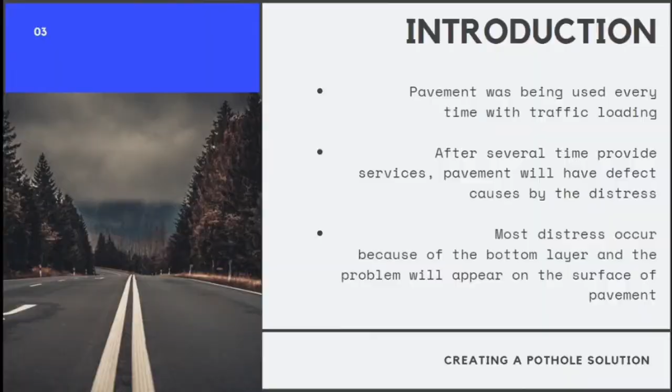The real location that we chose is at Selangor Darul Ehsan road pavement distress, located at Jalan Putra Perdana 9A, Puchong, Selangor. This 1 kilometer road, used every day by the surrounding population as a main road, will give a negative impact if the distress problem is not solved or overcome.

This road is used by all the population near the road. Of course, it will give a bad impact if the distress or defect is not solved or overcome, and maybe a lot of complaints were made, but the local authority needs time to make a repair or maintenance.

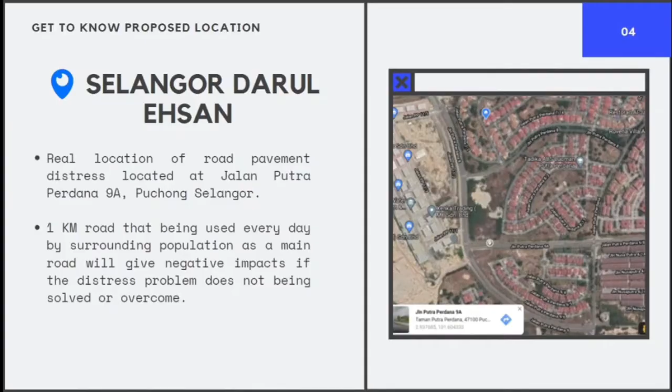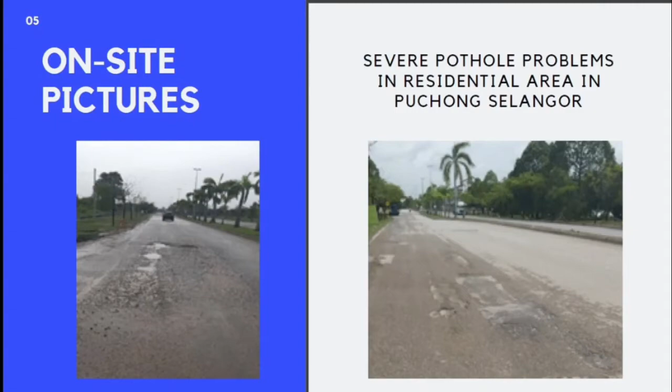So this is the on-site picture, and this defect occurs on the surface at the located area. We can see how bad it is, how the pothole and other distress are, and this will give a bad impact to the users and maybe a very negative effect for them.

For the literature review, the important content that I will present is pothole, road maintenance, and pavement mixture technology.

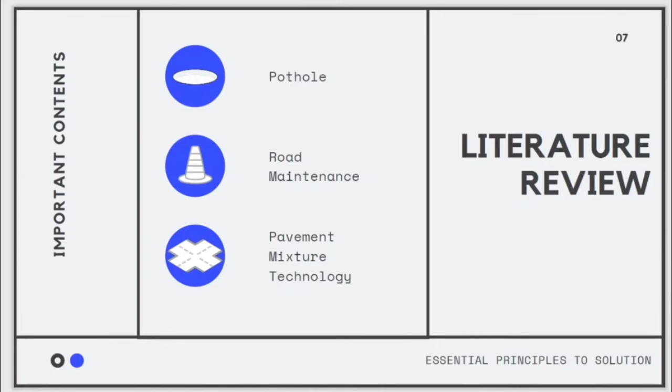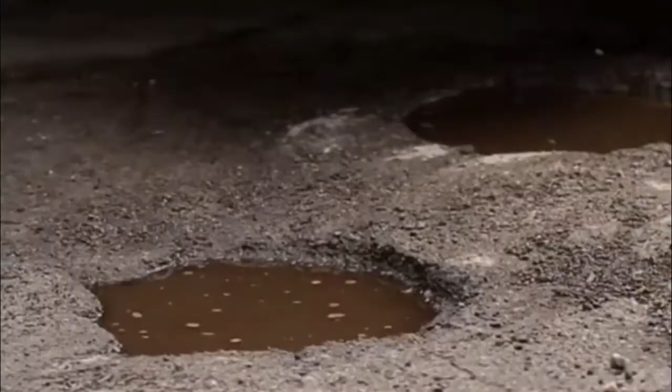So for the first one, about the pothole: physically it has sharp edges and vertical sides near the top of the hole. The pothole is likely to occur on roads with thin HMA surfaces around 25 to 50 millimeters, and occurs on roads with 100 millimeter or deeper HMA surfaces.

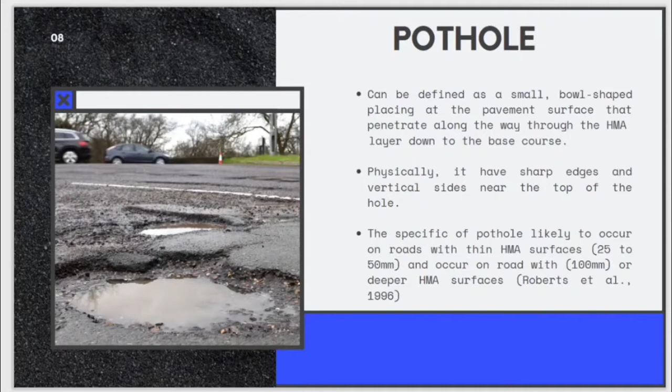It can be defined as a small bowl-shaped opening at the pavement surface.

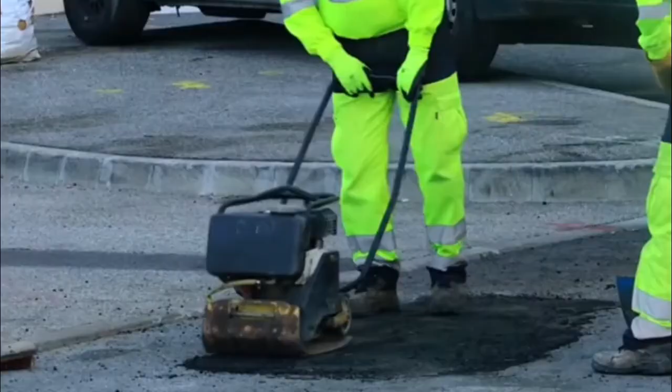For the next one, the literature review about road maintenance: a number of researchers have studied the performance of pavement networks and the likely causes of distresses. It was stated that the most likely causes for the worsening of road networks in Jordan are, for example, trucks with actual loads exceeding the recommended limit, poor sewage systems, and lack of quality control.

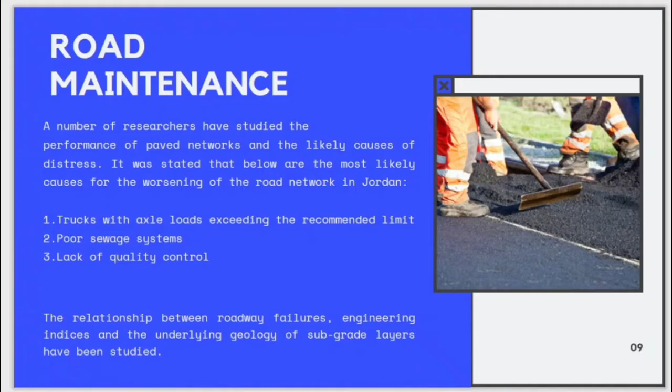And then for the third main content of literature review, the pavement mixture technology, which might be the main focus of our project writing.

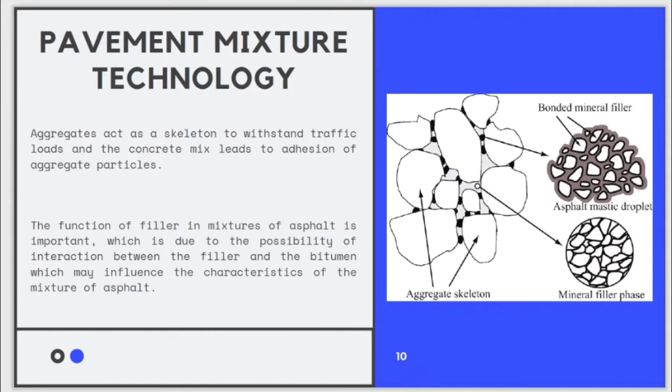The aggregate acts as a skeleton to withstand traffic loads, and the concrete mix results from the adhesion of aggregate particles. The function of filler in the asphalt mixture is very important, due to the possible interaction between the filler and the bitumen, which may influence the characteristics of the asphalt mixture.

Waste material may be considered mainly under the following categories: the first is industrial waste, such as cellulose waste, slag, bottom ash, and fly ash. The second is municipal or domestic waste, for example scrap rubber and glass waste. The third is mining waste, such as coal mine waste. And the last is construction and demolition waste, such as recycled concrete aggregate and brick waste.

To determine how to fix the problems and improve the durability of the road, we carried out PCI tests. The test was carried out by selecting 1 km of road from the section, and we divided it into 10 unit samples with 100 meter length each.

This was carried out by determining the distresses occurring at 5 out of the 10 samples, with an interval of 2 - the samples selected are 1, 3, 5, 7 and 9. The PCI value was calculated by determining the deduct value, total deduct value, and corrected deduct value. The type and severity of distresses are recorded in the survey form.

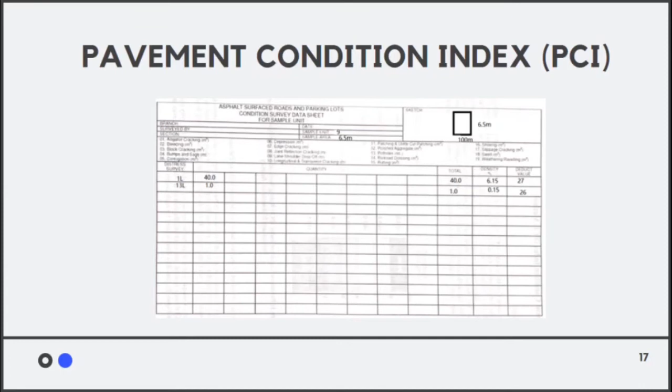As shown in the survey form, the density and deduct value were calculated and recorded also. We got an average of 55.4 PCI, which is considered fair condition and requires rehabilitation.

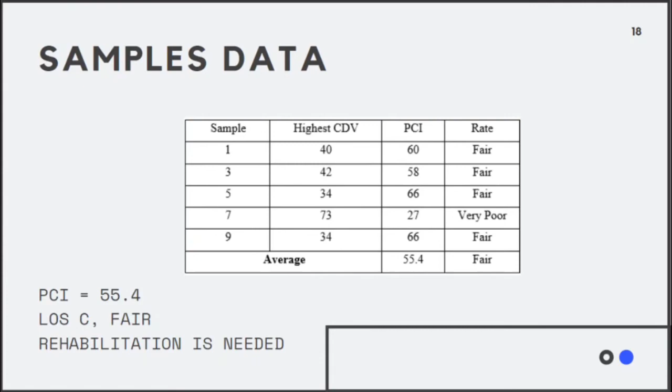Rehabilitation is used to repair the road without reconstructing it. It can be done by just resurfacing the road, and this is useful because flexible pavement always has a shorter lifespan, and most of them cannot last more than 10 years.

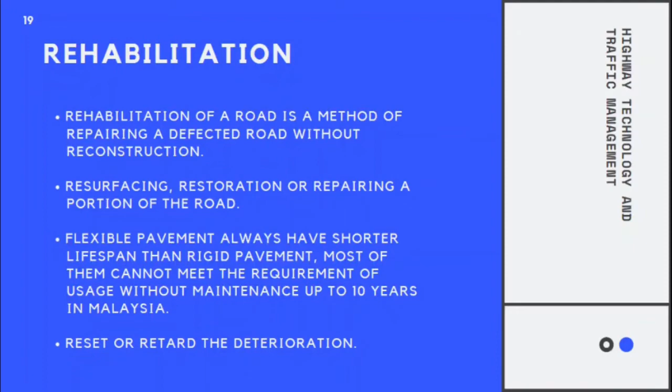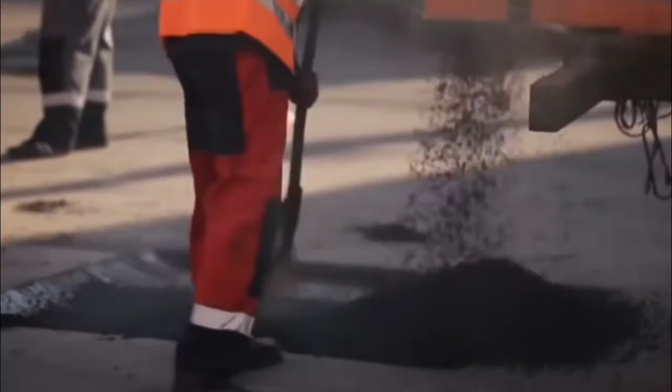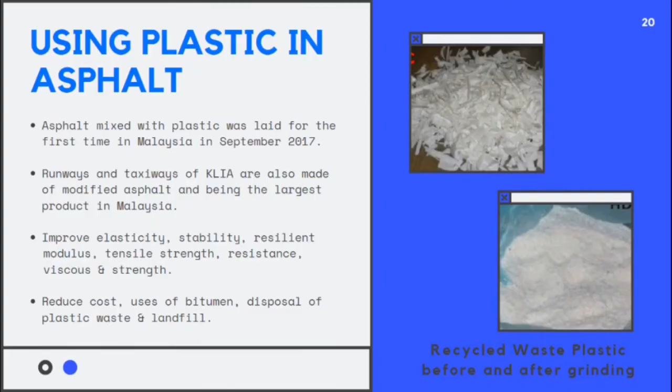In the meantime of rehabilitation, the innovation of mixing plastic into asphalt is introduced, and it has been tested in Malaysia since 2017 at KLIA. It improves elasticity, stability, and several other properties. It also reduces waste, usage of money, and pollution. The equipment used for rehabilitation is mainly a hot mix plant, shovels, bulldozer, and roller compactor.

First, remove the surface of the pavement which is in distress. Then break up the existing seal to remove the old and worn material. It also removes the road base if necessary. For the asphalt, you cut plastic into small pieces and heat the aggregate at 160 degrees Celsius to 170 degrees Celsius in the hot mix plant.

We then pour shredded plastic into the hot aggregate, so we can add the new materials on the surface and compact the surface. After compacting, we can seal the surface and let it cool for 10 days. After that, the road can be used and only maintenance will be needed.

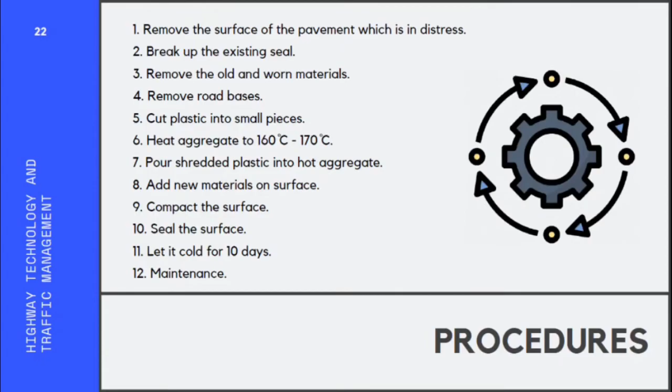Hi, I'm Izzah. So as a conclusion, in terms of practicality, it is realistic and workable since Malaysia has been ranked 8th among the top 10 highest offending plastic polluters globally. This innovation will focus on the usage of waste plastic in recycled form, as pavement asphalt can serve as a valuable outlet for such types of waste materials.

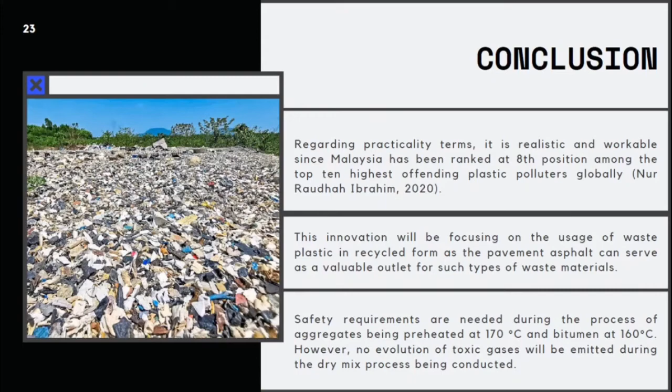Safety requirements are needed during the process of aggregates being preheated at 170 degrees Celsius and bitumen at 160 degrees Celsius. However, no toxic gases will be emitted during the dry mix process. Next, efficiency in field implementation is undeniable since it has already been implemented in the real world, so it is reasonable to be conducted widely in Malaysia.

Reduction in the requirement of bitumen by approximately 10%, avoiding anti-stripping agent use, and development of eco-friendly innovative technology are some features that lead to cost effectiveness. Apart from that, it is beneficial to the country and society by making roads more durable and water resistant to some extent. The utilization of waste plastic helps to consume substantial quantities of plastic waste in the environment, leading to more economical roads of better quality and safety for Malaysian road users.

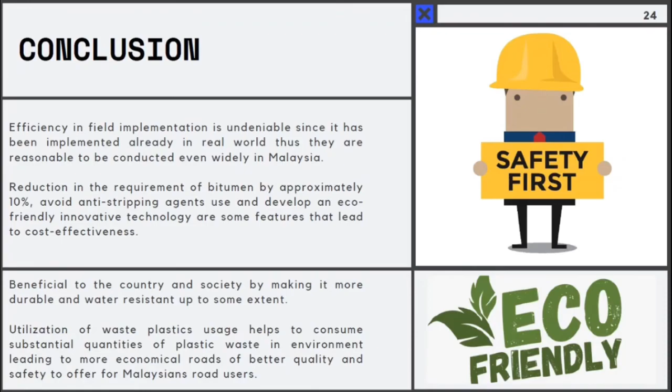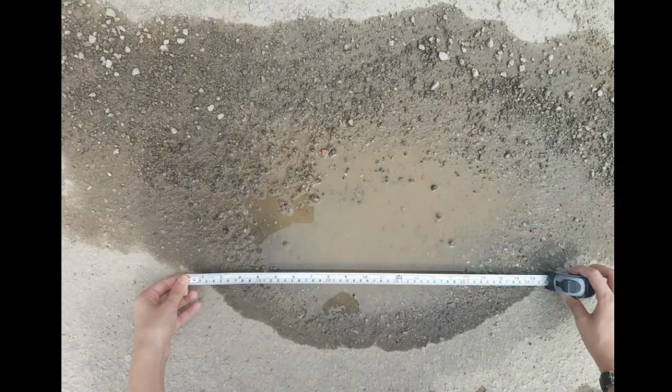Assalamualaikum and hi, my name is Putri. I will explain the Pavement Condition Index, which is PCI. So the first step, we need to measure the road length within a 1 kilometer radius. Next, the width of the road needs to be measured to determine the sample area.

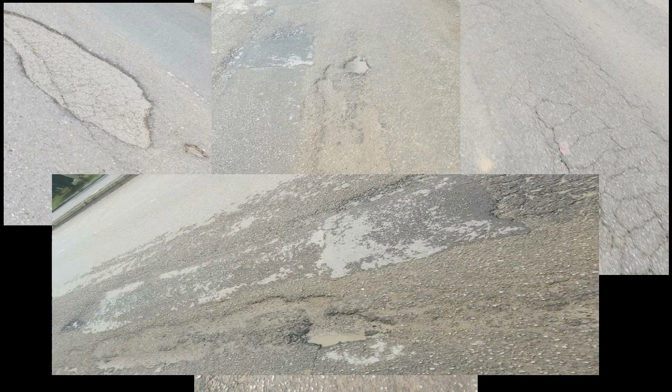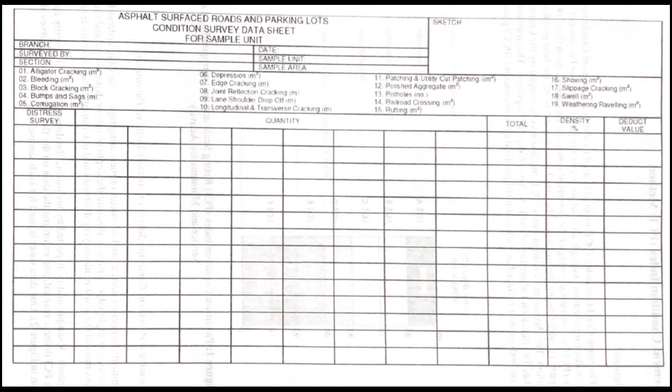We need to identify the name or types of defects such as slippage, bleeding, pothole, depression, crocodile crack and other cracks. We have to list down the defects of the road pavement, then the density percentage, and the important one is the deduct value. To calculate the PCI value, first we add up the total of each severity level. For sample 3, there is a medium pothole and medium ravelling, so we got 1.0 and 30.0 respectively.

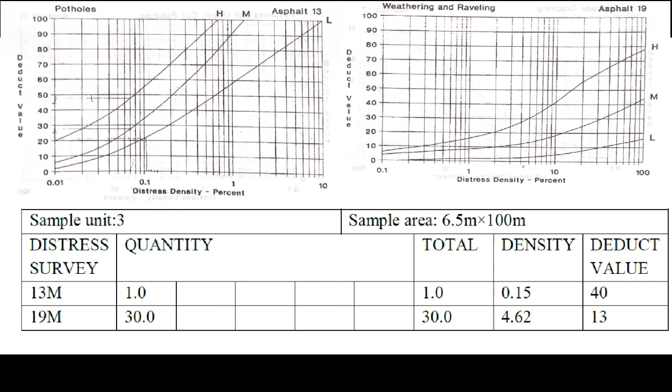By dividing the total value by the sample area, which is 650 square meters, and times 100, we got the density, which is 0.15 and 4.62 respectively. So we obtain the deduct value according to the respective graph. Next, to determine the maximum allowable number of deducts, we use all the deduct values and apply the formula with the highest individual deduct value. As the computed value is more than the number of individual deduct values, we use all values.

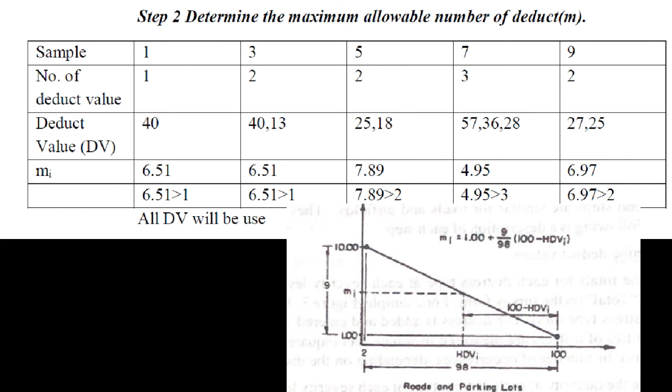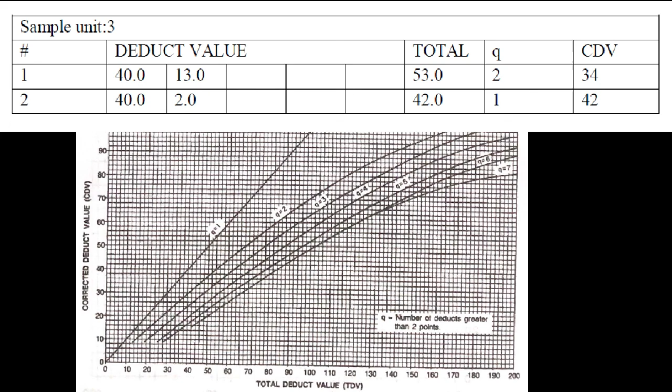So we refer to the graph again and find the corrected deduct value, with q as the number of individual deduct values. In this case, there are 2, so we got the first CDV, and reduce the 13 to 2.0 to find CDV at q equal to 1. After every trial, we selected the highest CDV from every sample. PCI is obtained by deducting the CDV from 100. The PCI values are 60, 58, 66, 27, and 66 respectively for all the samples. We calculate the average, 55.4, to be the overall PCI.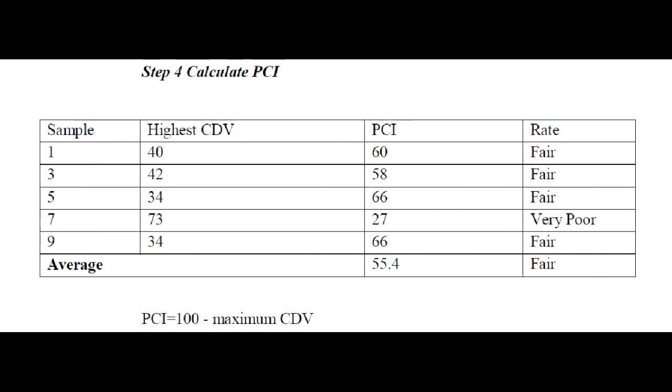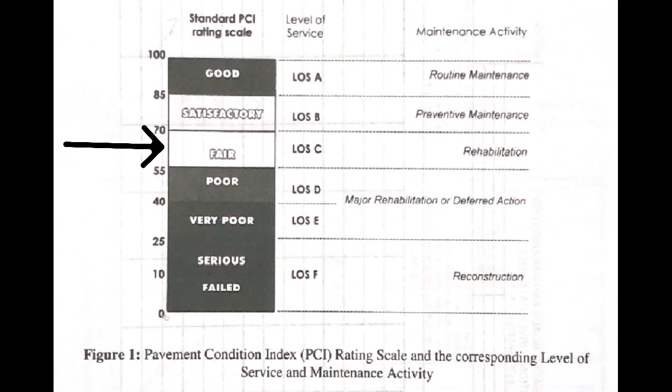Hence, after we conducted the PCI test from the sample data obtained, the PCI value is 55.4, which falls under the LOS C category, equivalent to fair condition. Rehabilitation is needed, which is a method of repairing a defective road without reconstruction, either by resurfacing, restoration, or repairing a portion of the road.